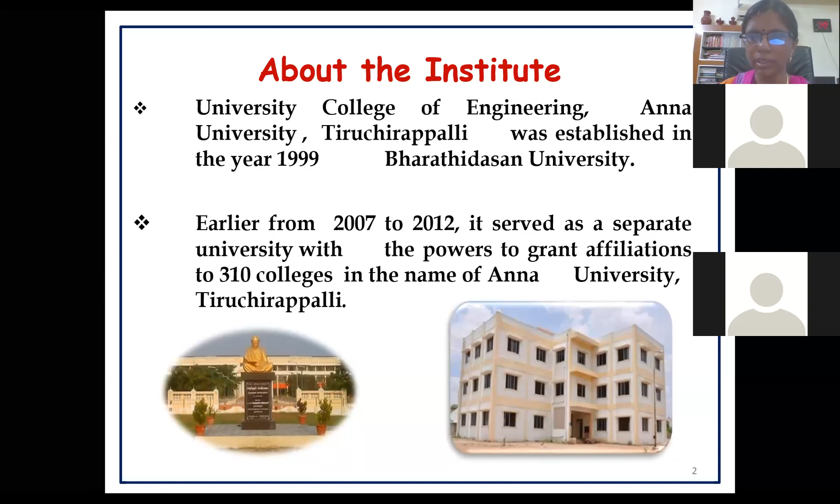We have more than 4 to 5 big buildings, which sprawl over an overall area of 354 acres. We have 15 departments offering BTech and BE courses in almost all disciplines, and we also have MTech, MS and ME programs, all accredited by AICTE, and also PhD programs under the control of Anna University, Chennai. There are around 5,000 students studying on this campus, and 700 teaching and non-teaching faculties, including non-permanent faculties, working here. It's a big campus completely under the control of the state government, Anna University, Chennai.

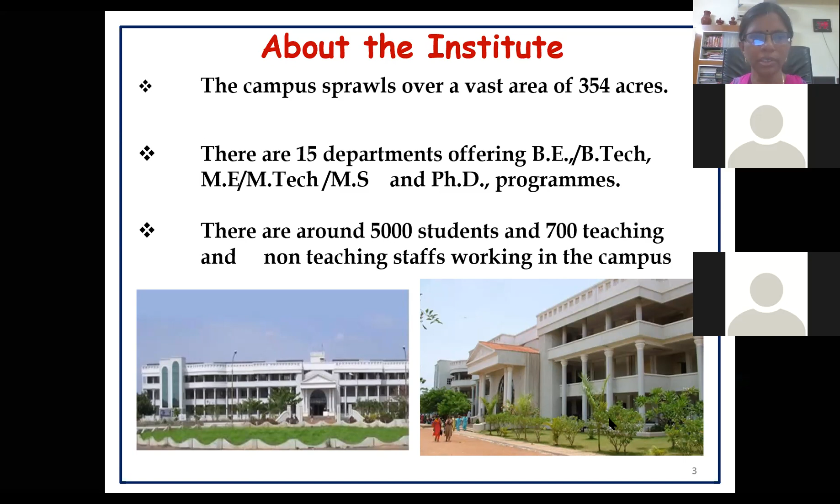So with this introduction, I go into the technical side of our presentation. We have to understand why we need this faculty development program.

So this faculty development program has been planned to throw light on the latest technologies available in waste management. Out of the different technologies available, I'm going to talk today about two different technologies called foam separation, which comes under the broad name of foam flotation, as well as biosurfactant foam separation technologies for wastewater treatment.

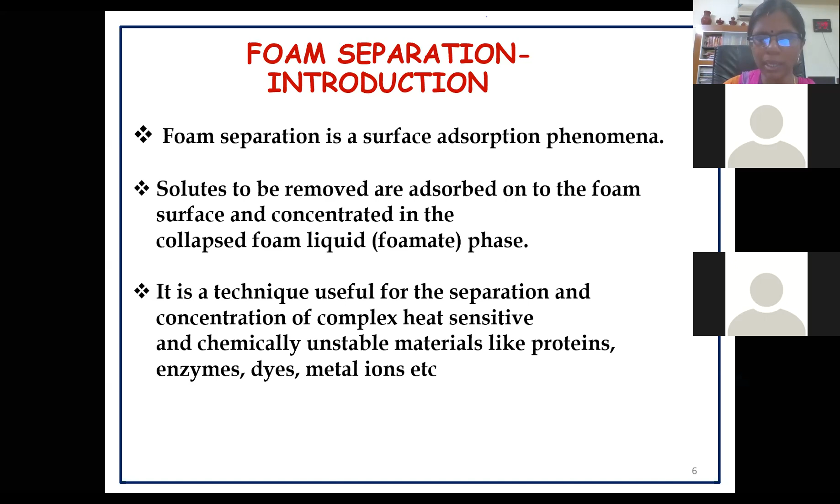That technology is now extended for the removal of pollutants from industries. So this is not a new technology, but the application has been widened to water treatment nowadays.

There are a lot of advantages of this foam separation technique. The young participants who want to work in water treatment can try this technology because of several advantages. The equipment construction is very, very simple.

There are no moving parts present in this equipment, so there is no friction, and the maintenance cost is very, very less. I'll show you the setup present in our laboratory, which can be used to treat very heat sensitive materials and also handle dilute solutions. These are some of the advantages of this technique.

There are several advantages of foam. Foam has got interfacial area. We heard that because of surface tension, the foam assumes the shape that plays a major role in adsorption.

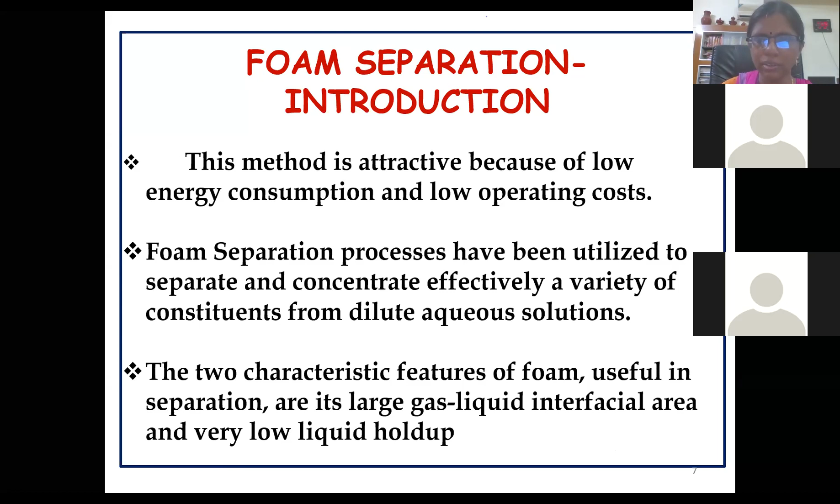When we add some surfactants and allow air or nitrogen into the solution, the bubbles get formed, and the foam or bubbles, when it rises through the liquid from bottom to top, it carries away the heavy metals and harmful chemicals from the effluent. That is a simple technique.

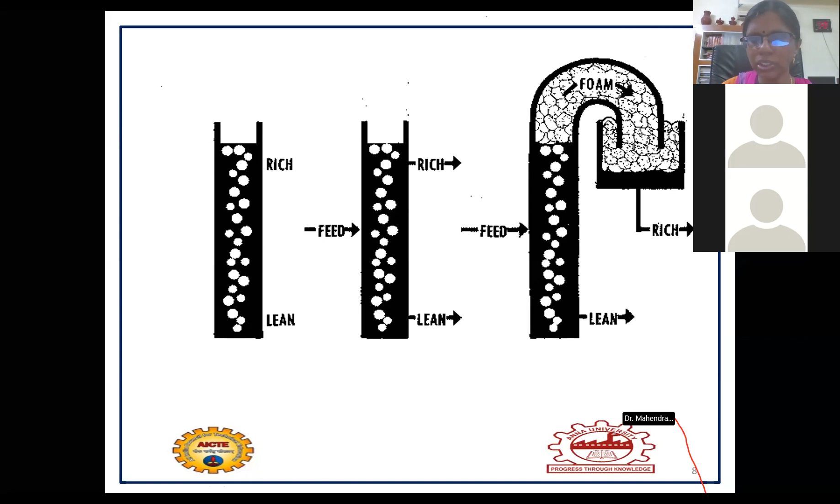Though the process looks simple, its application is very wide. We have to analyze the foam structure before going into the experimental part, because this foam structure plays a major role in the treatment.

When we see the structure of foam with the naked eye, it looks like a sphere, but actually foam is not a sphere. Foam looks like it has got a pentagonal dodecahedral structure.

Foam always clubs as three bubbles joined together, or four bubbles joined together, and we get different shapes of the foam.

When you see from the naked eye, you may say that the foam is of a spherical shape, but it is not. Because of this coagulation of three different bubbles, we get this triangle structure, called Plateau border structure, or when four different bubbles form, we get a stable configuration.

Because of this configuration, we get good adsorption properties. We need to study the foam structure also.

We have attempted some modeling part also, wherein we have done mass balance calculations and framed differential equations. Mathematical modeling also has been tried in our project. So we have to have knowledge about the foam structure also.

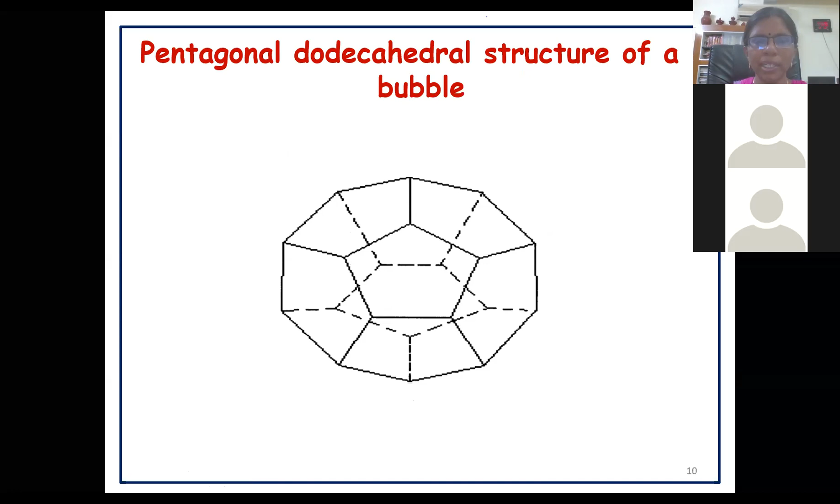This is the foam pentagonal dodecahedral structure. It's not a sphere. This structure is very important and plays a role in the adsorption of heavy metals and harmful chemicals from the wastewater.

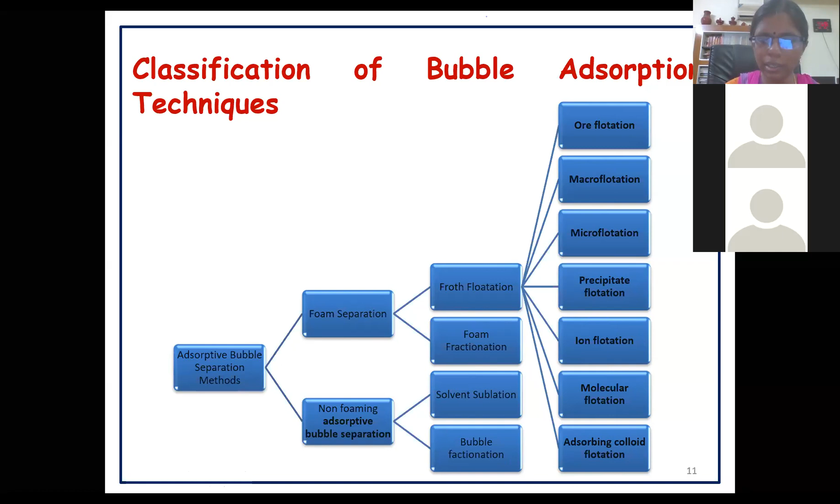Foam fractionation is a technology we have applied for our metal ions removal. These are the major classifications. We can work on any area depending upon our requirement. This gives the definition, and the next two slides will give the definitions of different technologies available.

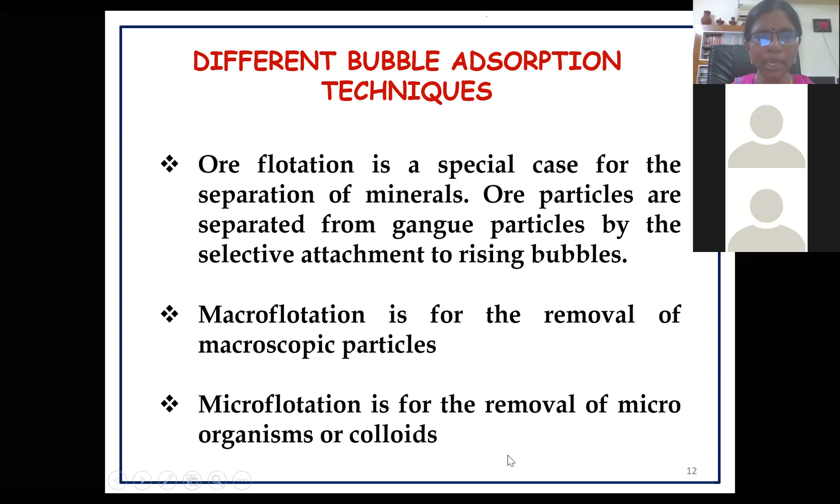Say for example, if you take ore flotation, we know that it is useful for separation of gangue particles from the ore. Minerals can be selectively adsorbed using the ore flotation process. Macro flotation is useful for the removal of macroscopic particles, and micro flotation is for the removal of microorganisms or colloids.

Similarly, ion flotation is for the removal of surface inactive ions through the use of surfactants, and molecular flotation is for the removal of surface inactive molecules. Precipitate flotation is where the precipitate is removed and the precipitating agent is other than the surfactant. Adsorbing colloid flotation is useful for the removal of colloidal particles. So these are some definitions of the different flotation technologies available.

Surfactant, or the bubble forming material, is very important and plays a major role in the success of the flotation process. The majorly used surfactants are sodium lauryl sulfate and SPAN 80. The chemical name of SPAN 80 is sorbitan monooleate. So these two are the very successful surfactants which are used in a flotation process.

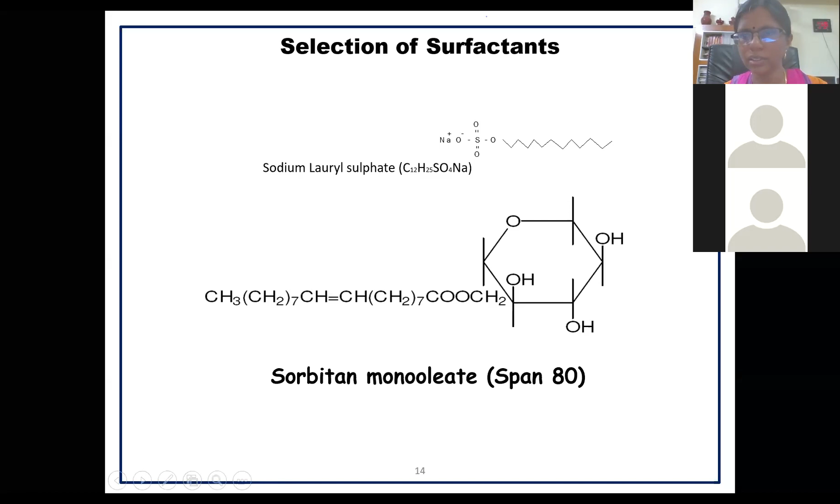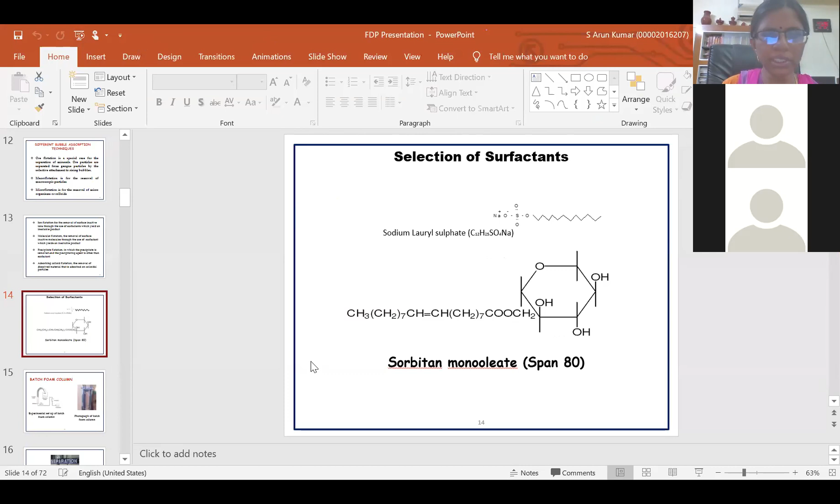So these are the successful surfactants which can be applied for the removal of harmful chemicals using the flotation process. This slide shows the batch experimental setup available in our laboratory, which we have designed for carrying out the batch experiments. We tried initially with the foam separation alone.

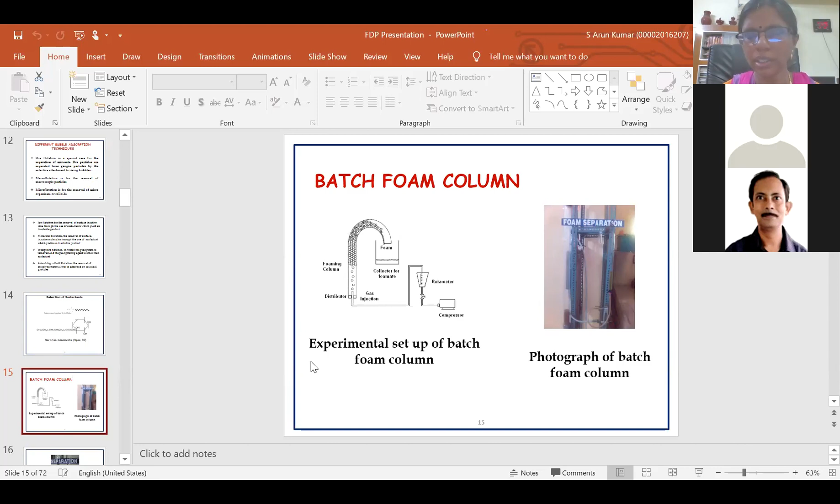Madam, full screen, please. Yeah, sure. Is it okay, sir?

Yes, okay. So this is the batch biosorptive batch foam separation column available in our laboratory, and the experimental setup is also given here. A simple compressor through which we can measure the flow rate, and through which the air is passed. Air, even nitrogen cylinder, can be connected here.

There is a small glass or polymeric column in which the liquid to be treated, or effluent to be treated, is taken. When we pass the air slowly into this, we should have added some amount of surfactant into the liquid earlier, before starting the experiment.

Once the air is injected, the foam starts to form, and as it rises from the bottom to the top, it carries the pollutants like phenolic compounds or metals or any other harmful chemicals present in the solution along with it on its surface, and it gets collected gradually.

As it travels upwards, the carried away liquid gets drained back again, and we get the dry foam at the top. So we can collect the dry foam in a beaker, and once we keep it on the table for 1 hour, it collapses, and the concentrated liquid or pollutant gets collected on top.

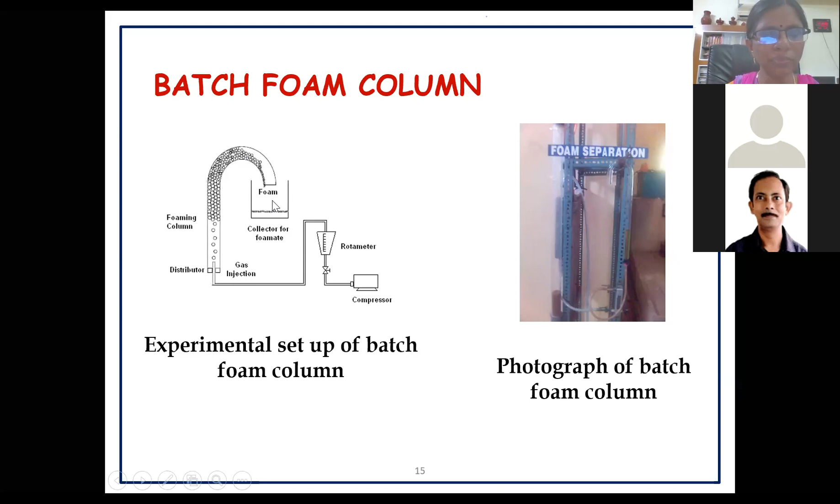This part is called foamate, and left over is the clean liquid. I shall show next the photographs where the foam is rising.

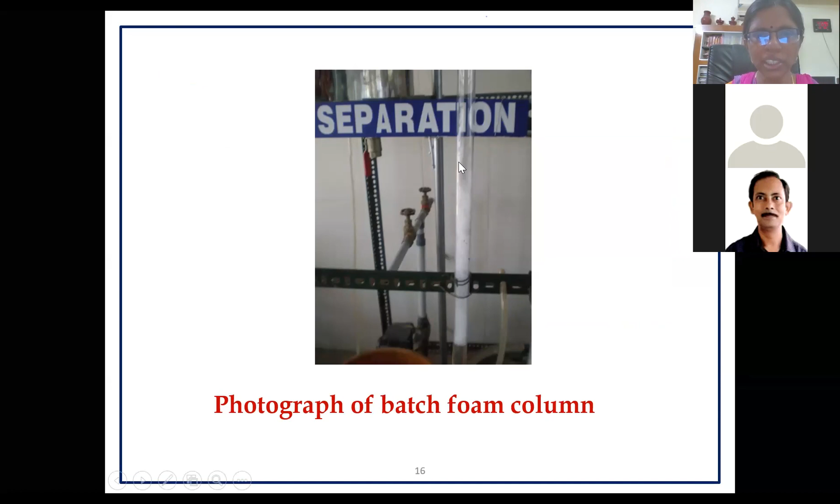Here at the bottom of the column, the pollutant liquid is taken, and through the compressor the air is passed, and the foam gets raised here and collected at the top of the column.

And these are the dimensions of the foam separation column we used in our study. Nearly 2 centimeters of diameter. Height we can fix according to our need.

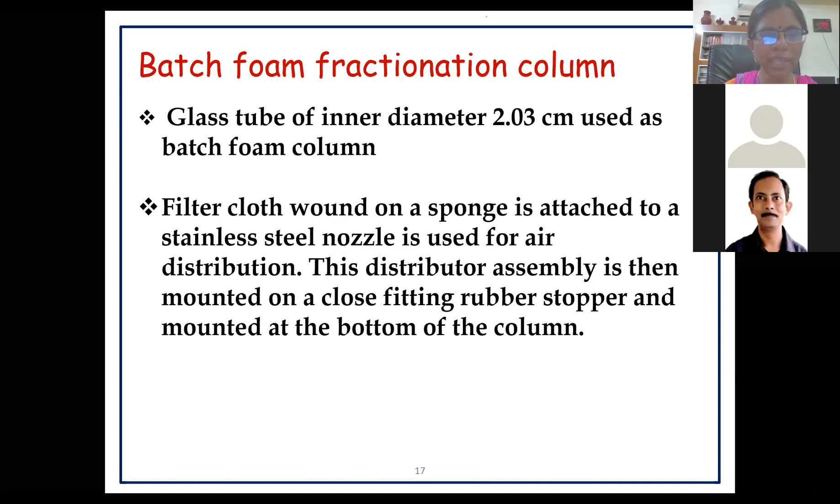For sparging the air, we have made a filter cloth wound sponge attached to the nozzle, so that uniform distribution of air takes place. Distribution of air is also a very important factor for improving the efficiency of the separation. So this assembly is to be kept at the bottom of the column, so that a uniform distribution of air happens, and the air carries away the metal ions.

Again, the design of sparger is very important, because once the sparger design fails, we may not get the proper size of the bubbles, and also it may collapse during its travel from bottom to top. So sparger design is very, very important, and we have to take proper care in designing the spargers. Depending upon the bubble size requirement, we can have different types of spargers. For our project purpose, we selected a sparger with a pore size of 15 to 40 microns.

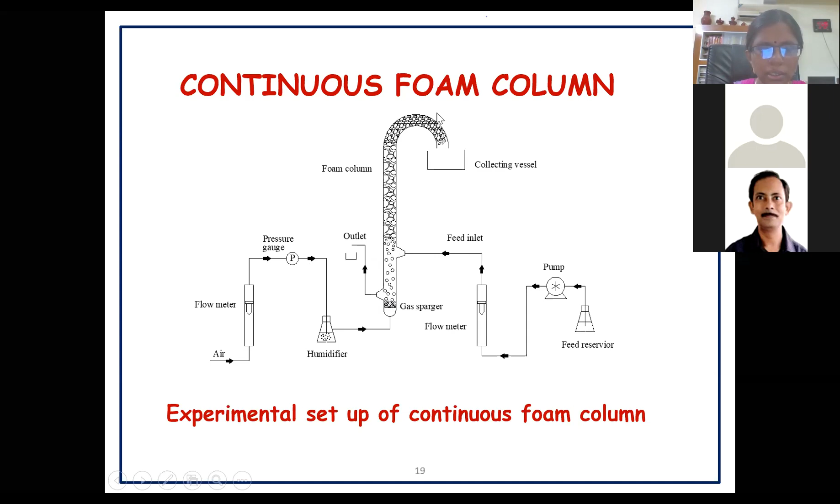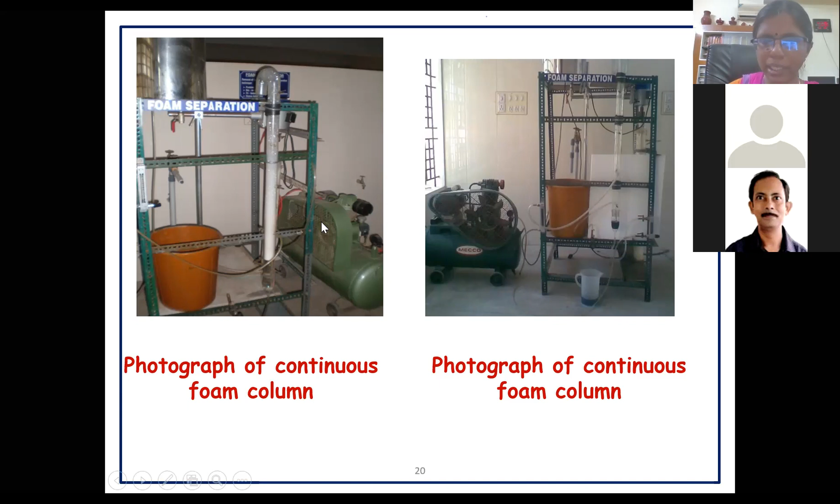So this is the setup of our continuous foam separation column. This is the bottom of the column. Here, from the compressor, the air is circulated through the sparger, and we also give input to the column of the liquid effluent. The foam gets collected from the top, and we can collect the dry foam from this part. I hope the participants can understand the experimental setup.

So this is the experimental setup and the foam separation operations. Now, what are the applications of this foam separation operation?

Any tannery or electroplating industries which let out heavy metals can very well apply this technology for removal of heavy metals. For example, even paper mills which use chromium chemicals, lead or other chemicals, can also successfully utilize this technology for removal of harmful chemicals.

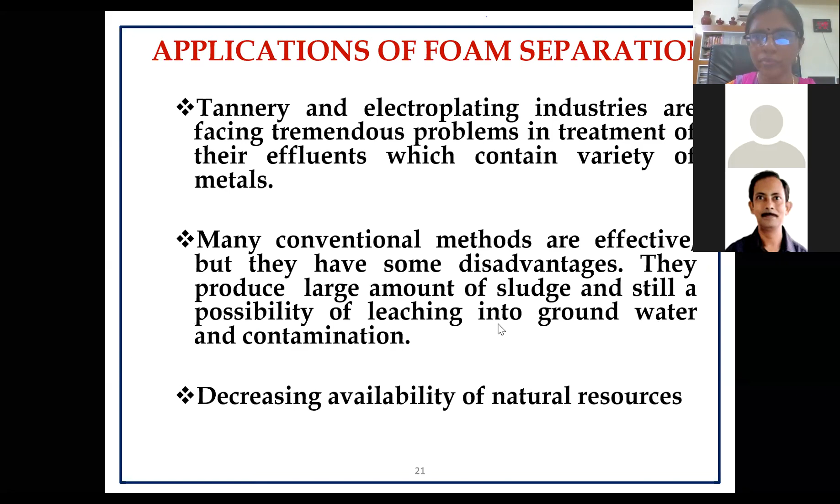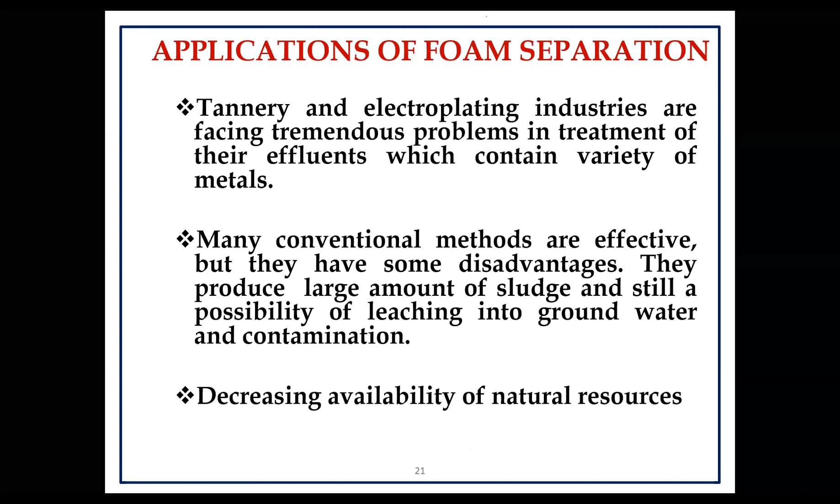Many conventional methods are effective, but there are some disadvantages - they produce large amounts of sludge. That is one of the biggest advantages of this process: we get very little sludge collected at the top of the column, which needs further treatment. So a large quantity, say 1000 liters, is converted into some 5 liters. So there is a reduction in the concentration and quantity of sludge happening here - that is the biggest advantage of this process.

This foam separation can be applied to the removal of metal ions like copper, zinc, and chromium. Copper and zinc are sources from electroplating industries. Chromium is the source from tannery industry. We took both types of effluents and successfully utilized this technology for removal of these chemicals.

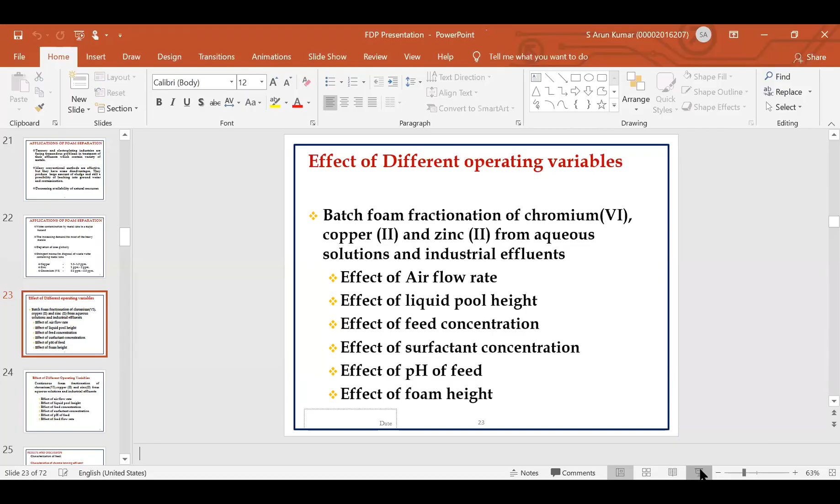So we also studied the different parameters which affect the process, such as flow rate, liquid pool height, feed concentration, surfactant concentration, pH of the feed, and foam height. For continuous operation, there is one extra parameter which has to be measured and controlled - that is the feed flow rate.

So these are some of the parameters whose effect we have experimented with for carrying out the operation.

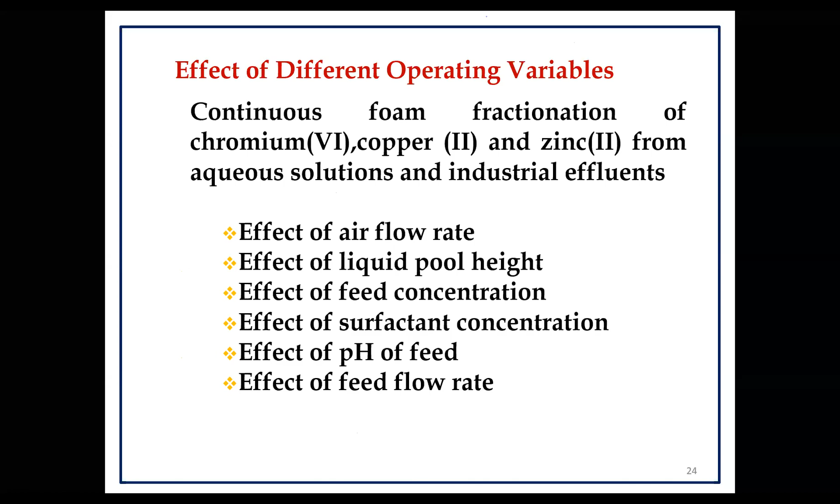The effluents which we took from chrome tanning industry - Tiruchirappalli has got a lot of tannery industries, so we collected effluent from a nearby tannery industry, which has chromium concentration of around 3000 ppm, whose odor is also very high, and the color is very dark brown, and the pH is very, very low. Considering all these points, the experiments had to be carried out.

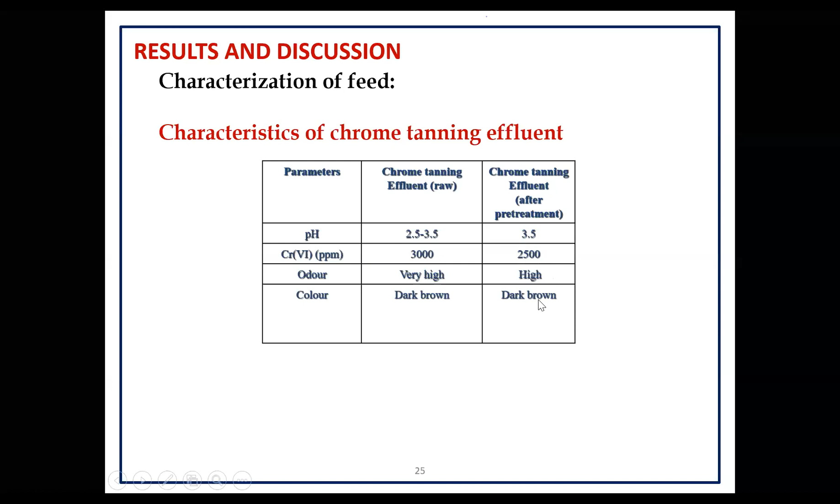The real effluent characteristics are given in this form, after pre-treatment - that treatment being filtration and settling. After pre-treatment and settling, the effluent concentration changes to a pH of 3.5, chromium concentration 2500, and the odor again is high, with dark brown color. It was taken for the foam separation operation.

Similarly, we have collected the electroplating effluent which contains copper and zinc from an electroplating industry from Madurai.

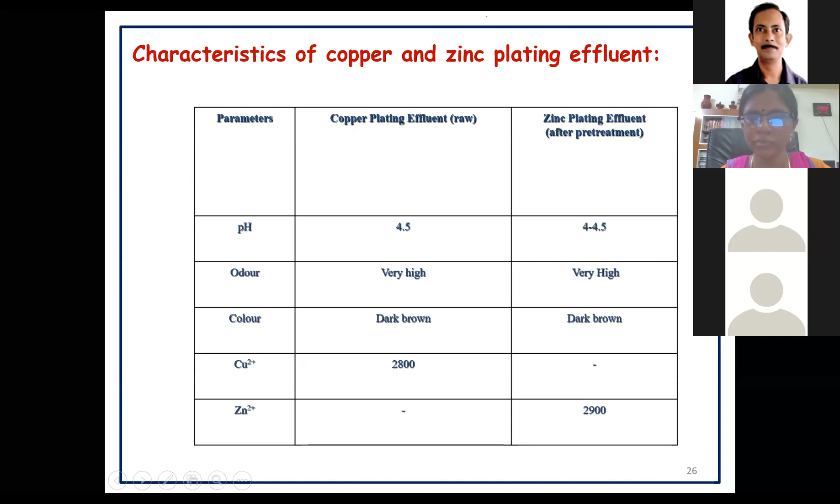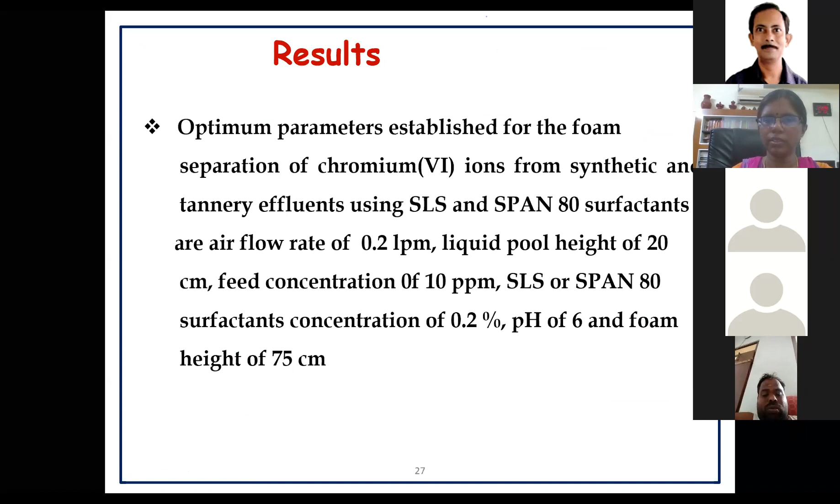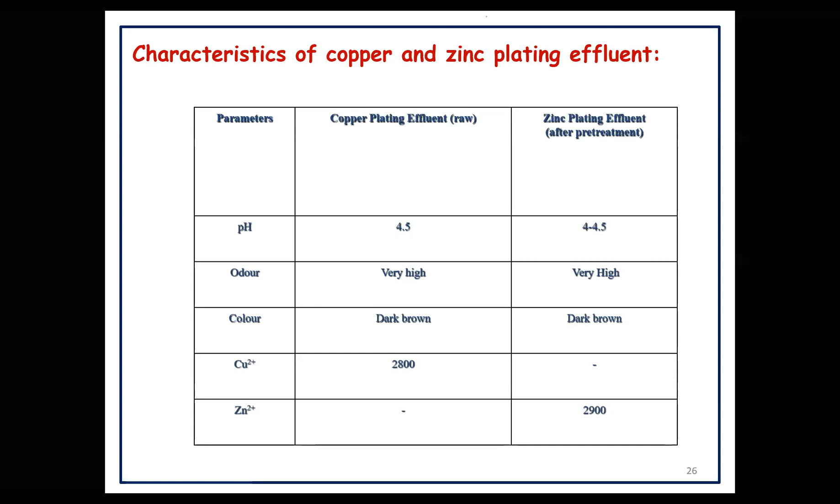So these are the effluents we have used for our studies. I don't want to go into the results of our study. So with the introduction part, if further clarification is needed, if anybody wants to work on it, we can have further discussions.

So results show that we used sodium lauryl sulfate and span 80 as successful surfactants for removal of the metallic compounds present in the effluent, and we controlled the airflow rate, liquid pool height, feed concentration, and surfactant concentration, and also pH has to be adjusted.

Since the actual effluent has got very low pH, it has to be adjusted to 6, and the foam height was around 75 centimeters. So these are the results we got. We got all these optimization studies using statistical optimization methods.

Once we optimized all these parameters, we applied it for continuous column studies also. Initially we did experiments in a batch column and extended to continuous column operations. So the maximum enrichment ratio was around 3.7 for tannery effluent, and we were able to apply it.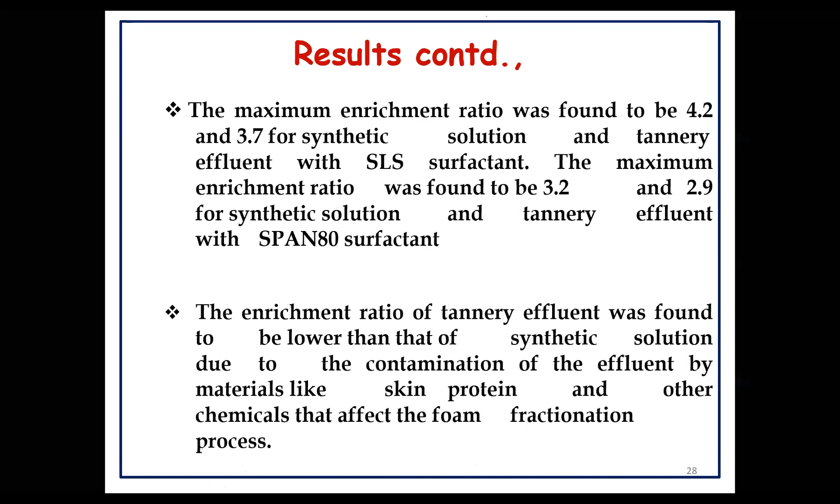We were able to get only a little lesser amount of efficiency for tannery effluent because of the contamination of the effluent and interference by the skins and proteins present in it. So that has to be filtered. Pre-treatment has to be done before going for this foam separation operation.

So I close this foam separation discussion with this introduction. I'd say we have completed the lab scale study, continuous column study, and also done some mathematical modeling. So our technology readiness level for this project is TRL3.

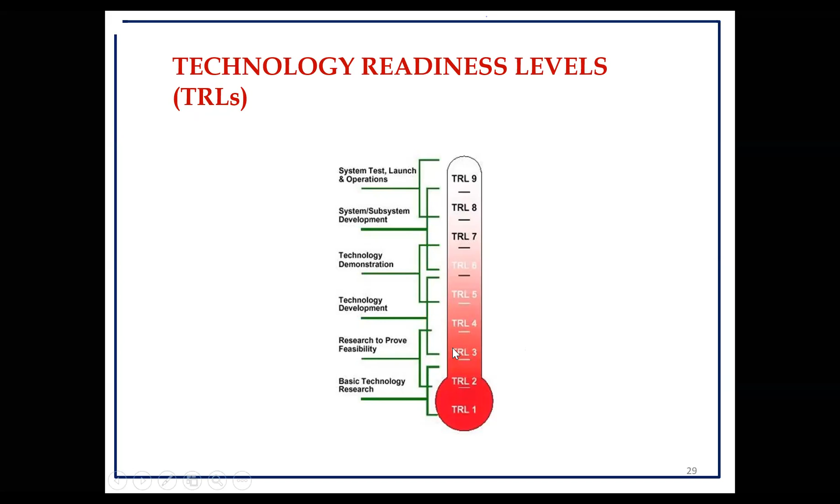I hope most participants can appreciate and have some idea about technology readiness level, because the funding agency is now looking for projects which are at least at the level of 2 or 3.

Only the SERB project asks for basic studies, whereas most projects from DST, DBT, and other funding agencies ask for projects with a technology readiness level of at least 3 or 4.

So this technology is at level 3, that is, proof of concept demonstrated analytically and experimentally, and we have successfully applied this technology for removal of metal ions as well as phenolic compounds, and we have also published our paper.

So the technology readiness level is 3, and based upon our experience we have now started to apply for projects that go for pilot scale studies and technology commercialization in collaboration with industries.

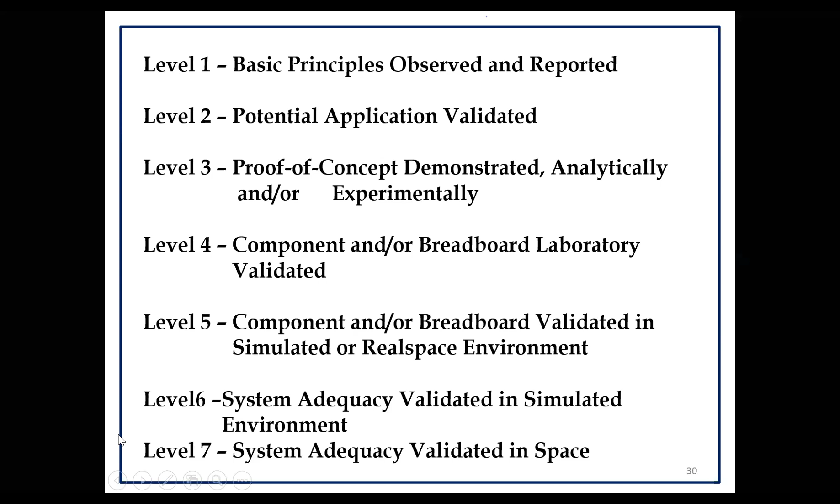And we have also done some mathematical modeling. The chemical engineering people or engineering people who are here can appreciate the concepts. I told you about the bubbles.

Bubbles have the same size and shape - actually, that's not true. Bubbles have different sizes and different shapes. As we assume the bubbles have a spherical shape, that is not actually the bubble's shape.

Once we observe the bubbles through the microscope, they have a pentagonal dodecahedral structure, surrounded by films and plateau borders. These are helpful for mathematical modeling. The structure of the foam is very important to analyze for framing differential equations.

So we made all these assumptions before going for the mathematical calculations, assuming each bubble has a dodecahedral structure. But as we said earlier, when 3 bubbles club together we get one shape, and when 4 bubbles club together we get a different shape.

So all those inequalities are neglected. We assume all the bubbles have a uniform shape and structure, and the coalescence of bubbles is ignored.

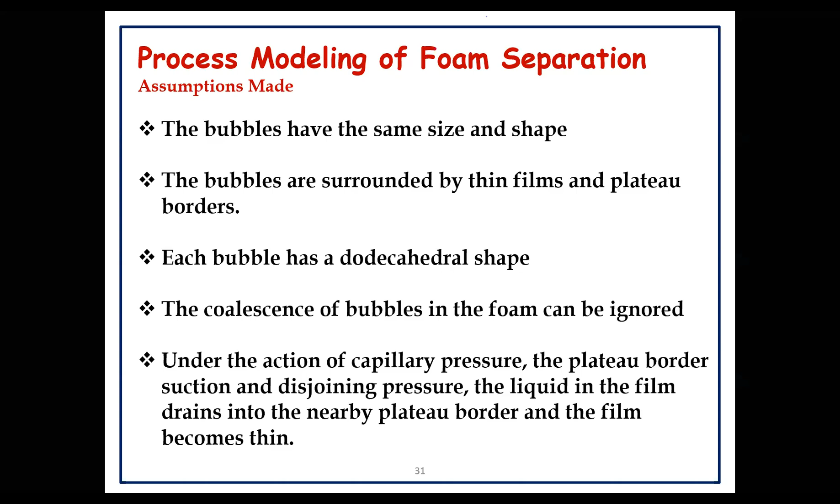These are some of the major assumptions made in the derivations, which cause some error, some difference between the experimental value and the mathematical modeling. So we have to put a material balance equation for the film and a material balance equation for the plateau border.

Plateau border is nothing but the films which are present. The corners of the foam are called the plateau borders, and we have to calculate the thickness of the film, and the plateau border area is then calculated based upon the thickness of the film. We used a tensiometer for finding out the film thickness of the foam.

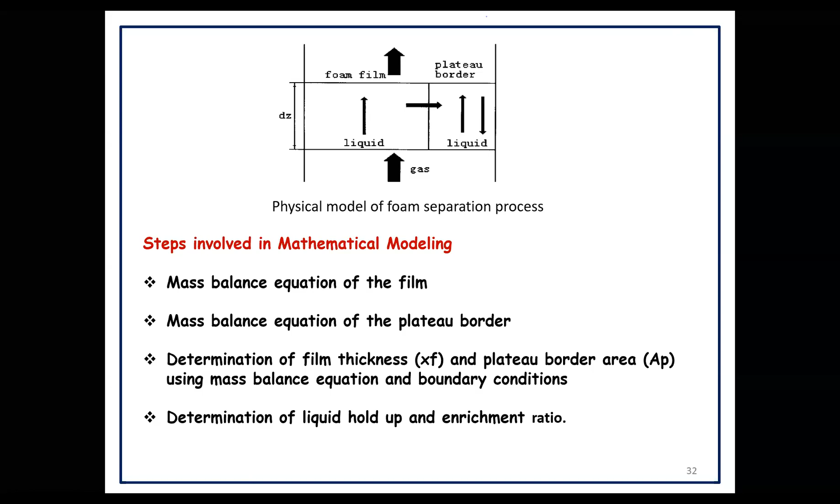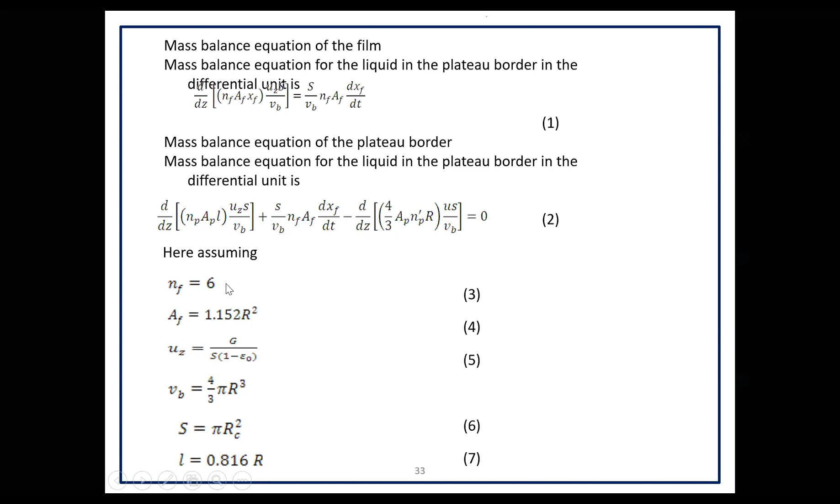Finally, we have to calculate the liquid holdup and enrichment ratio. These are some of the equations we used for our mathematical modeling, where we have also assumed the bubbles to have volume 4/3 pi r cube. The number of films per bubble is 6. So all such factors we assumed, and we got the enrichment ratio, which is given by this equation.

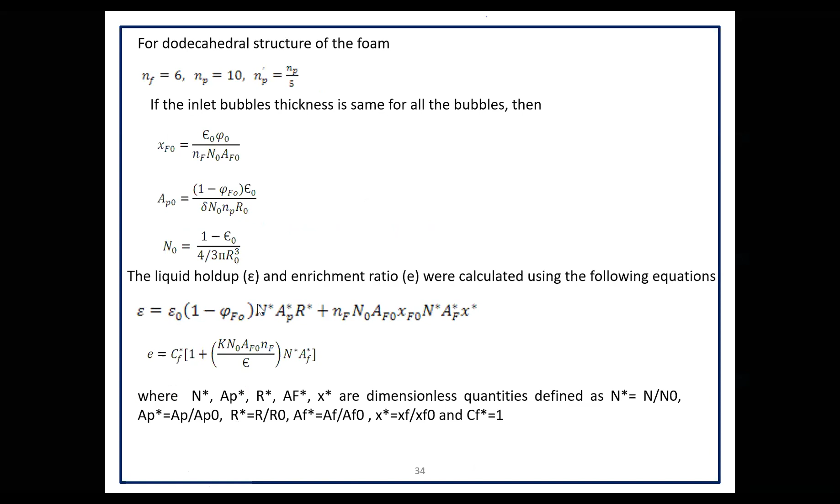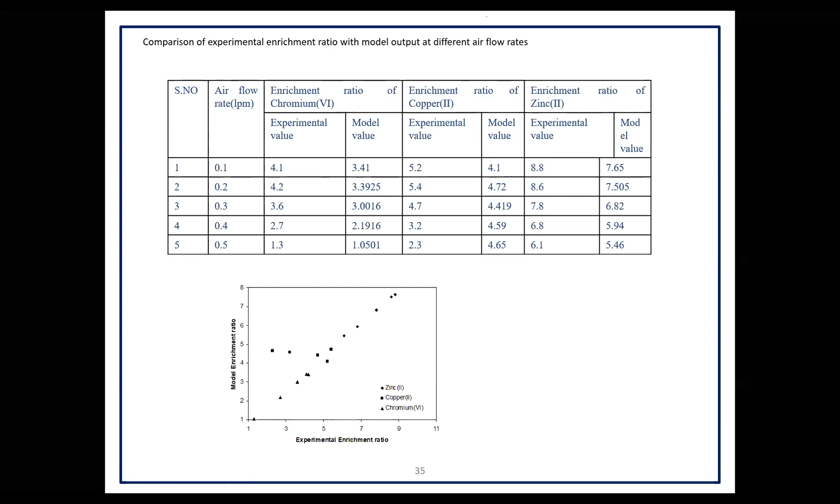The difference between the actual experimental value and the model value is given here. For different airflow rates, the difference between the model value and the experimental value is around 30%. That happened because of the drastic assumptions made. When we eliminate all such assumptions, I hope we may get better equations and the results will become similar. So further study has to be made, and those who are strong in mathematics can go further into the subject.

With this, I close the foam separation part of the treatment. Next, the extension of the advanced process of foam separation is the biosorptive foam separation technology, which gains much importance in the bioseparations field.

We have successfully applied the biosorptive flotation or biosorptive foam separation technology for the removal of metal ions as well as for proteins. So those working on protein separations can make use of this technology very successfully.

One clarification, ma'am — you said you can use nitrogen to cool things, won't that decrease the temperature? Nitrogen may be used as a refrigerant, so whenever we use pure nitrogen, the temperature reduces. In another slide, you said the operating variables don't include temperature. Yeah, because temperature doesn't much affect the process. But when nitrogen is used, the temperature might cool down — will it affect the efficiency? Only for certain situations do we use nitrogen, for materials which decompose in the presence of oxygen; for those, we have to go for another technique and nitrogen has to be purged. Otherwise, air is cheap material for producing it. So the composition of air is also important, right ma'am? Yes, yes. So with just a filter we can straight away take air from the atmosphere for usual operations, but only for extremely different, odd cases do we use nitrogen.

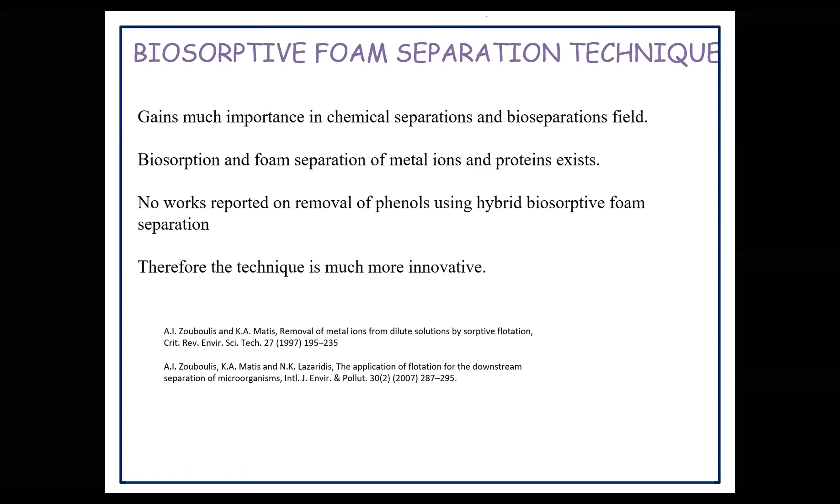After Zouboulis, we started this work. Many people have worked on foam flotation or foam separation, but nobody has worked on this biosorptive foam flotation process except Zouboulis, who himself contacted us and collected all our publications. So we are proud to say that this technology is very appreciated, an emerging one. Biosorptive foam separation clubs two different technologies called biosorption followed by flotation.

I would like to say a few points about biosorptive foam separation technology. Removal efficiency increases by subsequent stages of biosorption and flotation. Through flotation alone, we were able to achieve only some 70 to 80% removal, so to achieve 100% removal, we clubbed the biosorption and flotation technology.

At present, only Zouboulis and Matis from Aristotle University, Greece, have worked successfully on this technology, and after them, we tried it. Because of these advantages, we applied our technology for the removal of phenolic compounds. Since our department is the petrochemical department, phenols are petrochemicals which pollute the atmosphere, so we tried to remove phenolic compounds from industrial effluents.

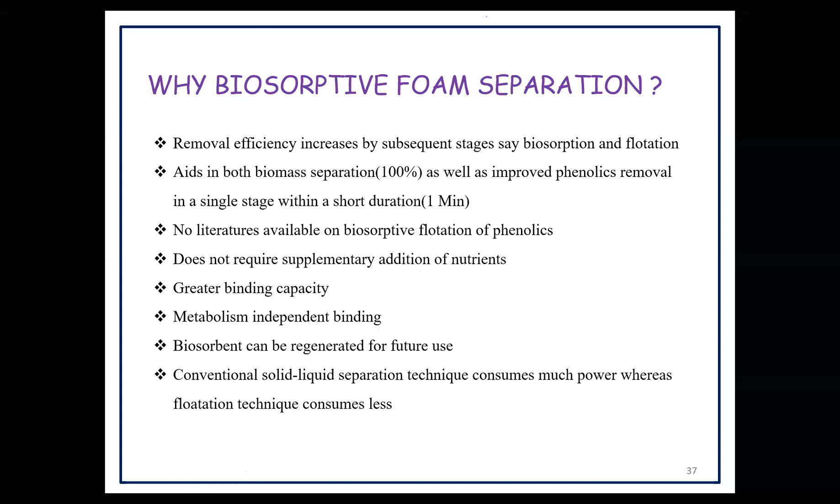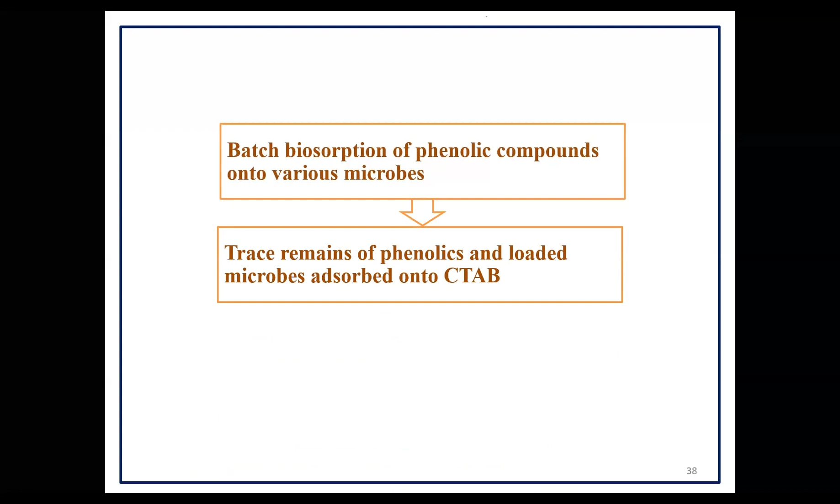So these are the steps involved in the batch biosorption process, the biosorptive flotation process. Initially, we carry out the biosorption process, and after that, it is followed by treatment with microbes, followed by the flotation technology.

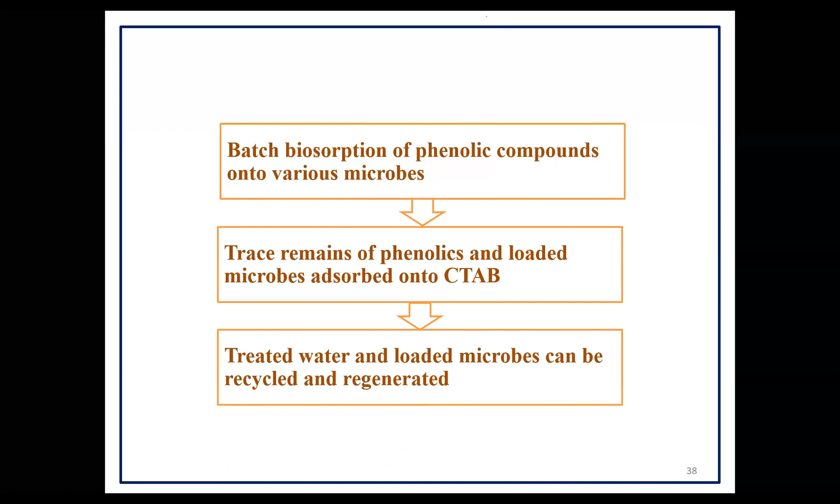So these are the bacterial or microbial cultures we used. Both bacteria, fungi, and yeast we used for microbial biosorption. In bacteria, we tried Micrococcus lylae, Pseudomonas putida, and Bacillus cereus, and we tried to remove different phenolic compounds from the effluent.

After this biosorption process, we used surfactant in foam separation, and we got the concentrated overflow and the treated effluent at the bottom of the column.

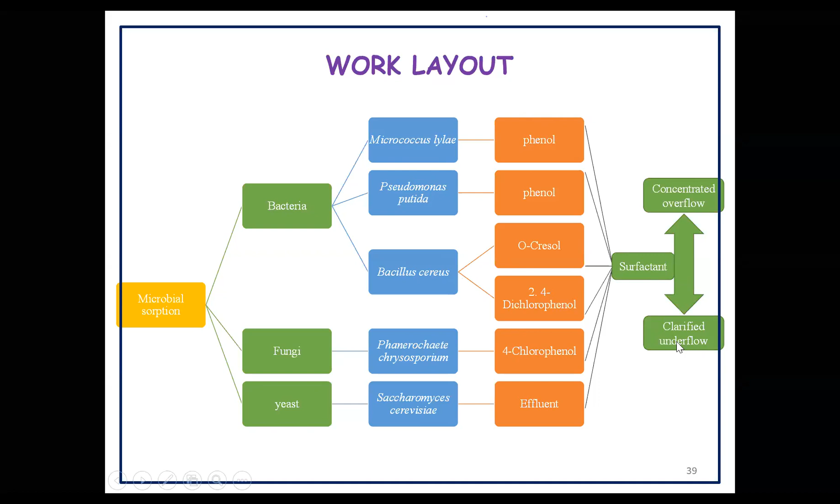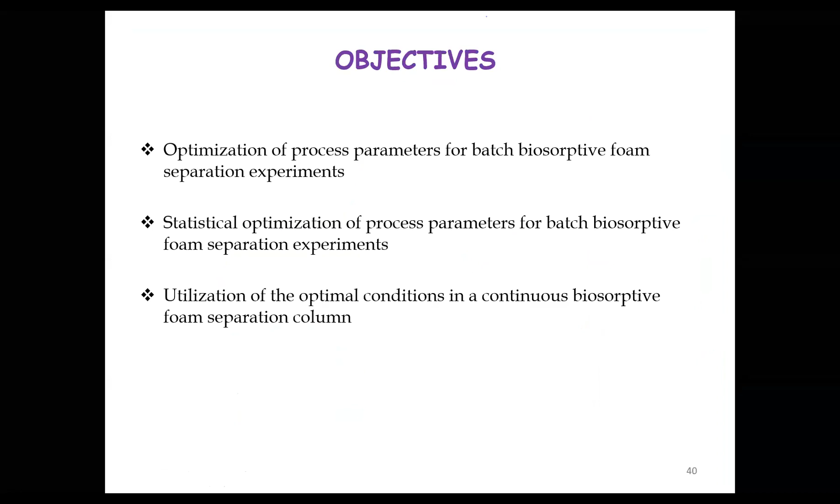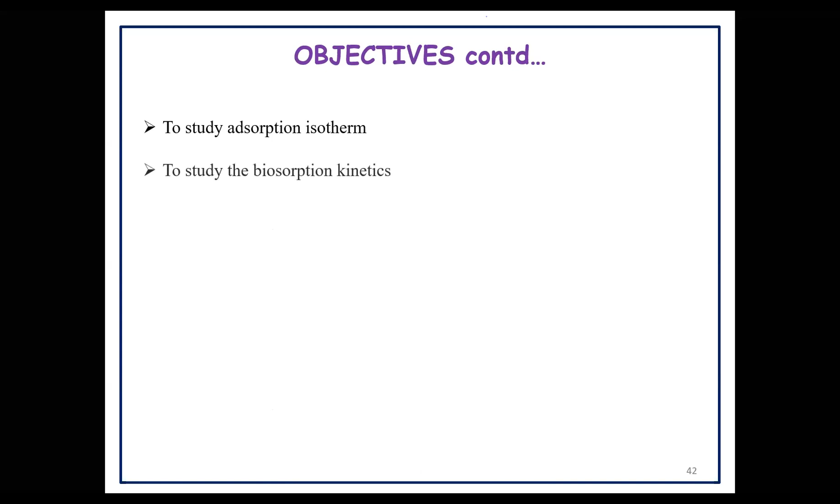So these are some of the objectives. We initially carried out all the experiments in batch biosorptive foam separation techniques, followed by continuous foam separation process. We tried to remove phenolic compounds like phenol, 4-chlorophenol, 2,4-dichlorophenol, cresols, and paper mill effluent using the different microbes mentioned here. We have also done biosorption kinetics, mathematical modeling, and isotherm studies.

Apart from that, our institute has a centralized instrumentation facility, and we have a center of excellence where we have all the analytical instruments available with us, like SEM, TEM. We also got TEQIP funding, through which we have purchased a lot of equipment for our institute.

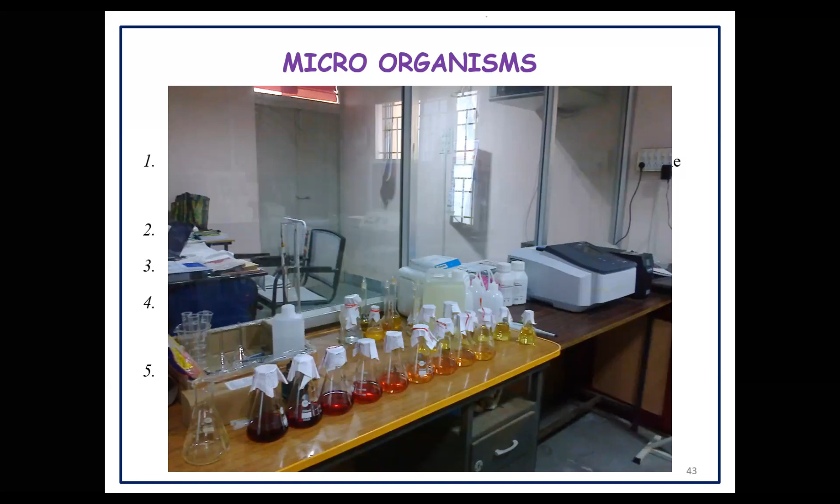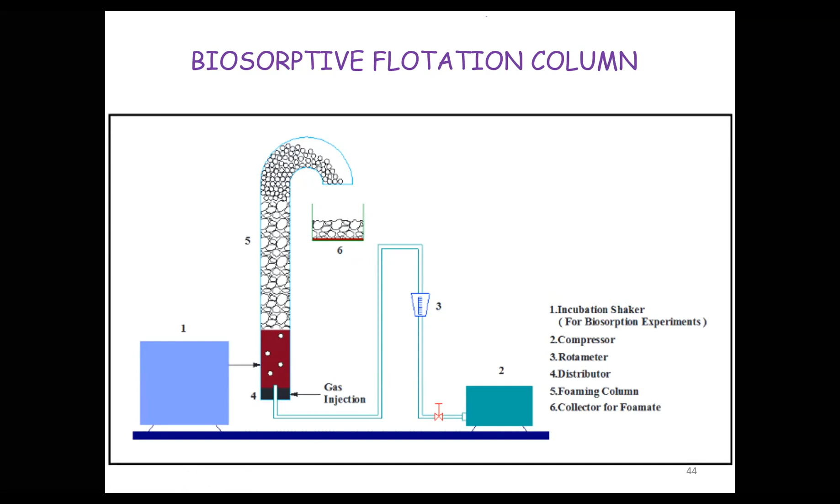So this is a small experimental setup diagram which shows the biosorptive flotation process. I have already shown this diagram. The only part added here is the incubation shaker, in which the biosorption part is carried out, followed by the foam separation part. So we have clubbed the biosorption process with the foam separation technique. This is the combined, hybrid setup of flotation with the biosorption process. That is the difference between the flotation and the biosorptive flotation process.

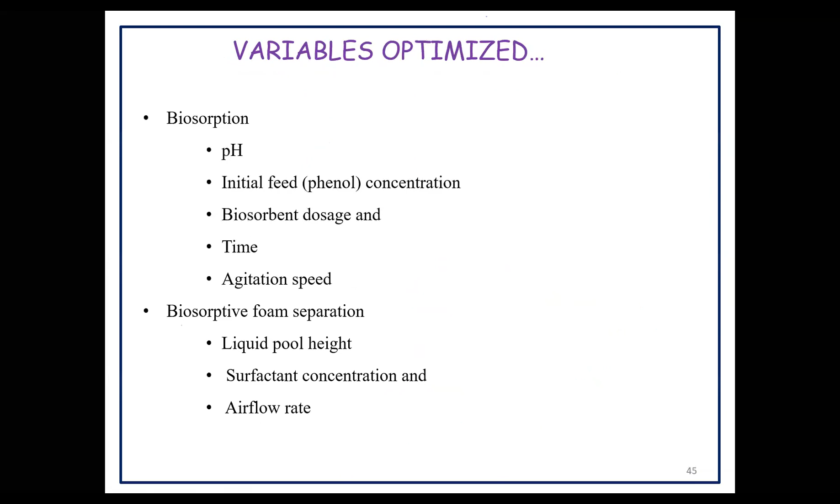So the variables optimized are pH. Some variables are already given in the foam separation part. Apart from that, for the biosorption part, these variables can also be optimized. For the foam separation part, I've already given them.

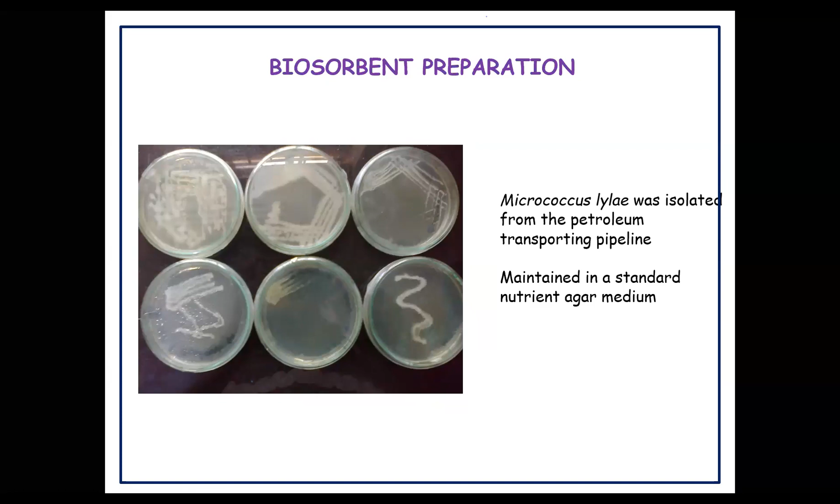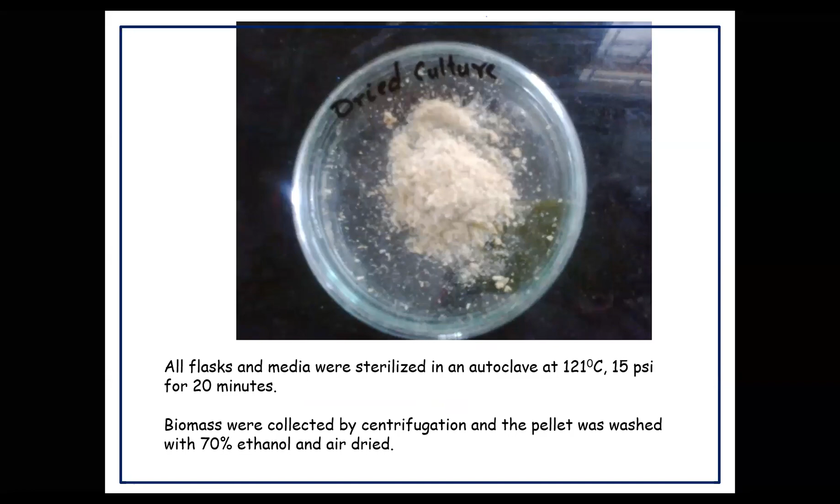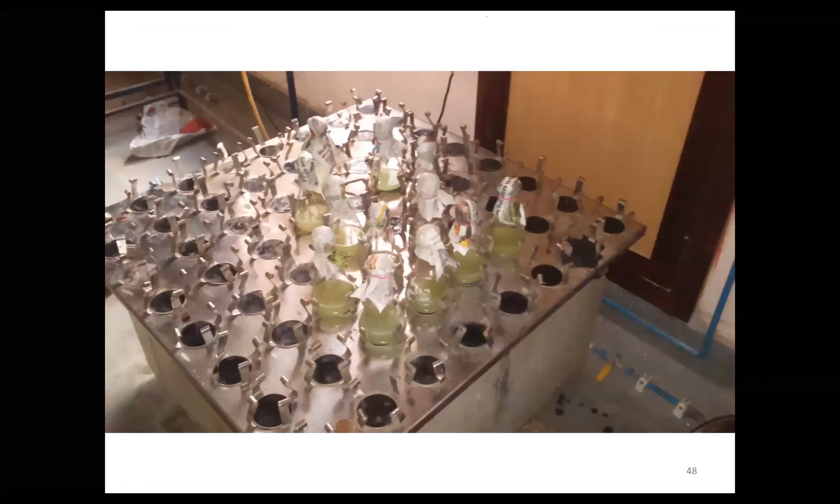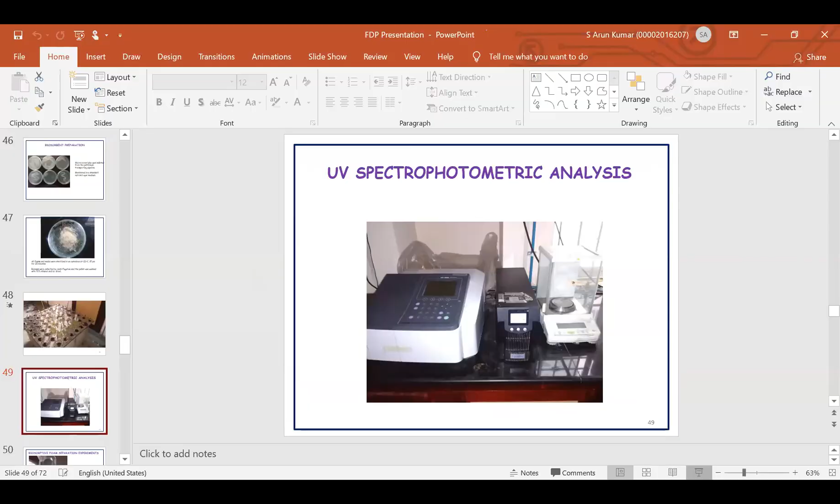So this is the UV spectrophotometer available, which can be utilized for phenolic compound removal.

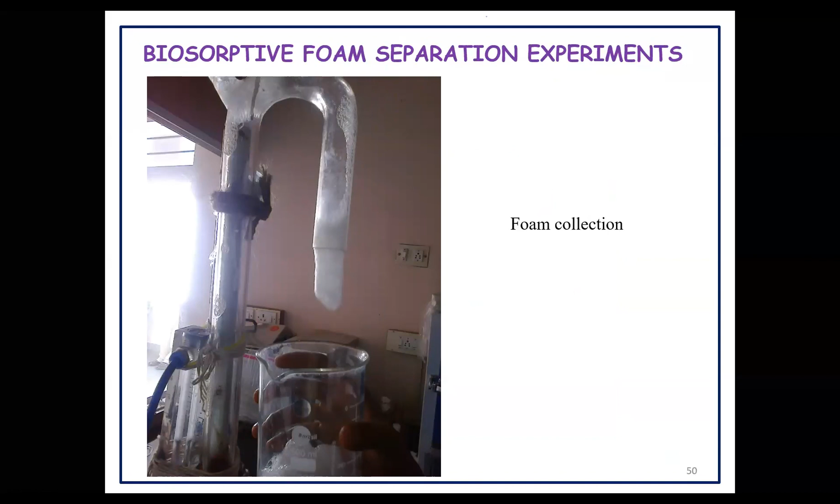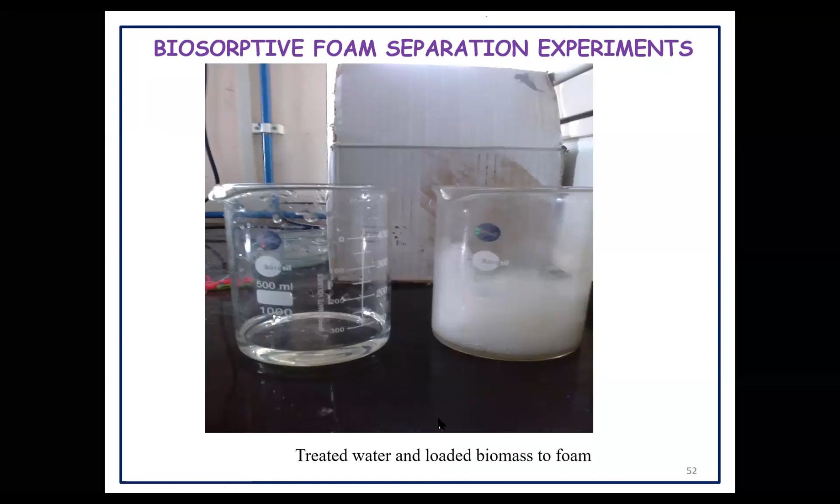See the phenolics with the biomass which we have collected at the top of the column. See, this is the treated effluent. This photograph shows the beakers containing the treated effluent and the biomass.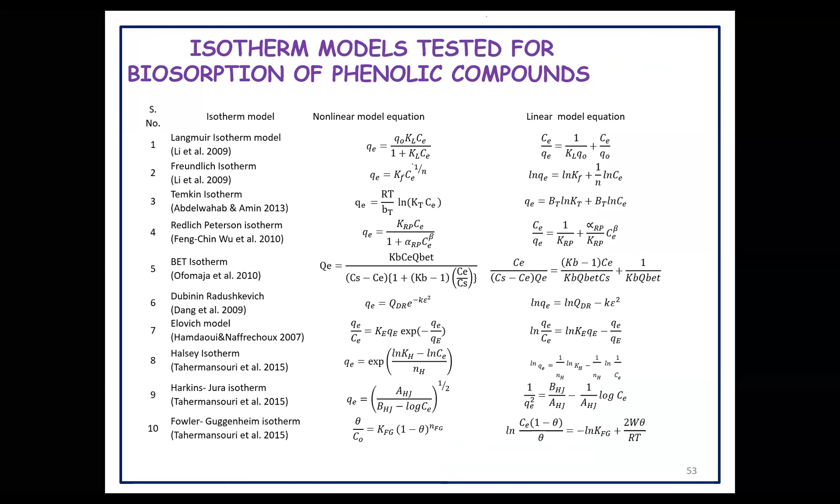So these are the biosorption isotherm models. We selected 10 isotherm models for our studies. And this is the photograph of the continuous biosorptive foam column, which we have designed and fabricated in our department.

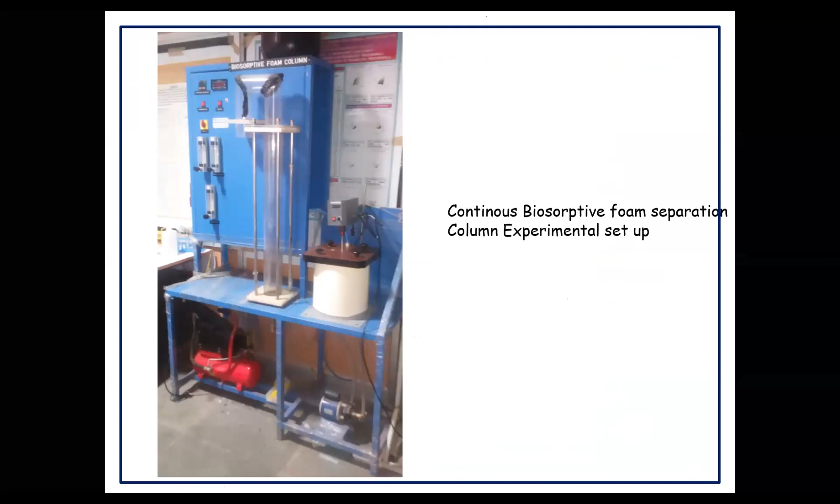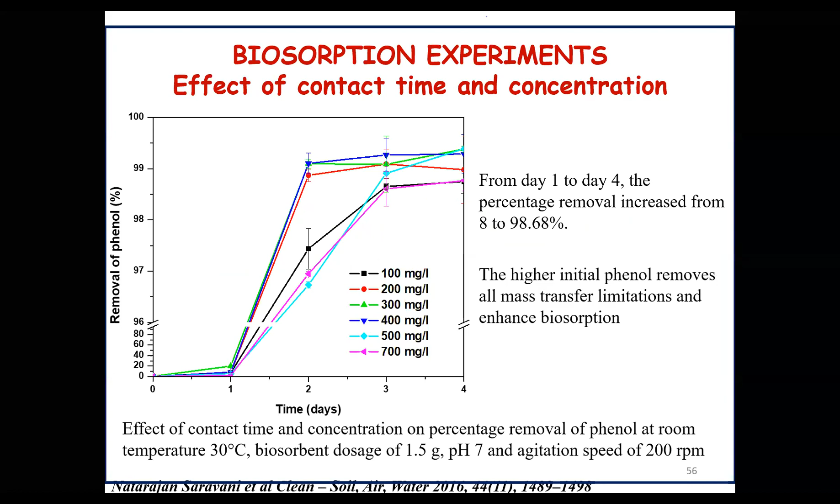So here I present the results of CTAB surfactant used for the extraction of phenol using Micrococcus lylae. These are some of the results. I don't want to explain more about this. Anyone interested to work more on this can go through it.

For the analytical part, we used FTIR studies to confirm whether phenolic compounds or metal ions have been removed and adsorbed onto the foam. We got results showing that the phenolic compounds have been very nicely adsorbed onto the foam surface.

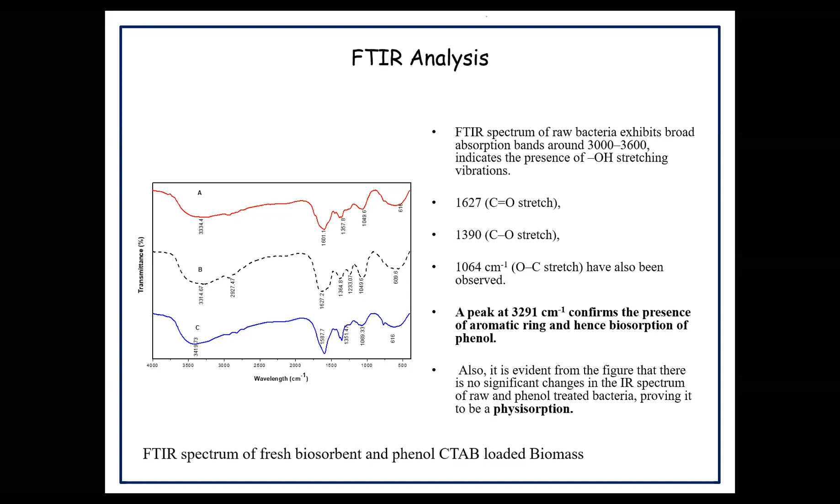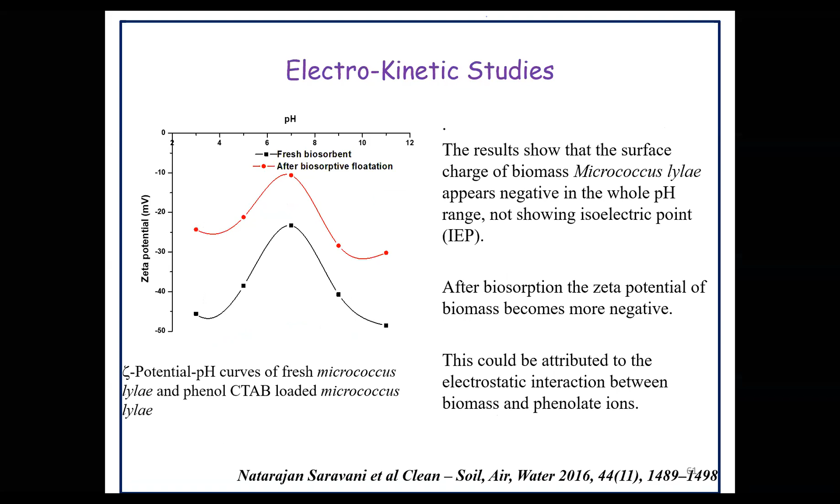We also did CTAB zeta potential studies to find out the electrostatic interaction between the foam and the phenolic compounds, and these are the results we got for the optimum conditions. Phenolic concentrations up to 500 ppm can be utilized. The time required for carrying out the experiments is 2 days, and the optimum pH is 7.

So these are the CTAB dosages. CTAB is nothing but the surfactant, cetyl trimethylammonium bromide.

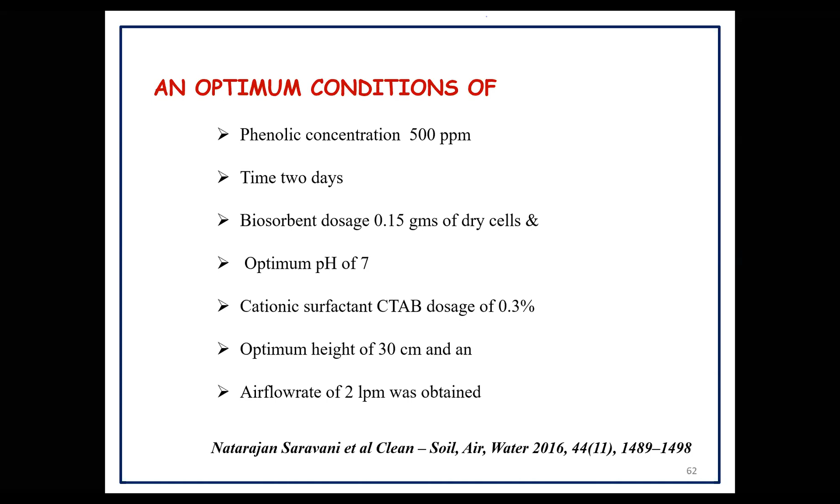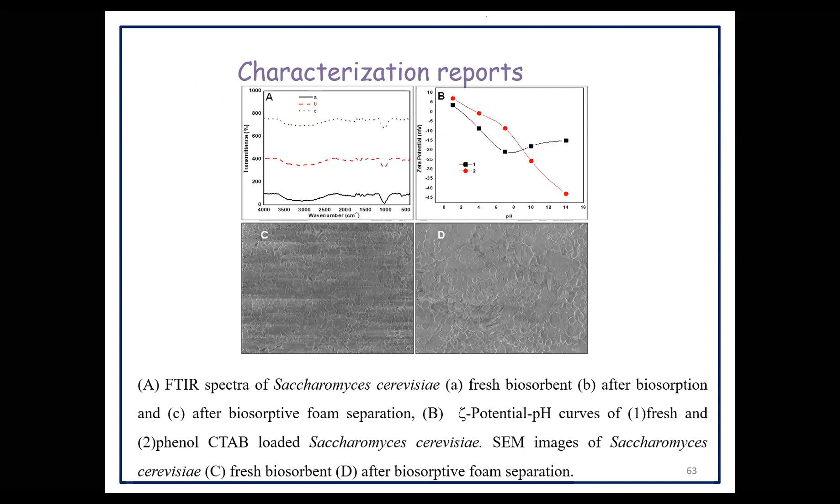That dosage is 0.3%. This work has been published in Soil, Clean Soil, Air and Water. So these are our characteristics from the FTIR report, and the SEM images show the difference between the fresh biosorbent and the biosorbent after carrying the phenolic compounds.

So again, we carried out the mathematical modeling using mass balance technologies, and we needed software for that. Before 5 years, we used C++ as the software. Now MATLAB and other software can be utilized for mathematical modeling.

So these are the conclusions. We can very successfully apply our work for phenolic compound removal as well as metal ion removal by using this biosorbent foam separation technique.

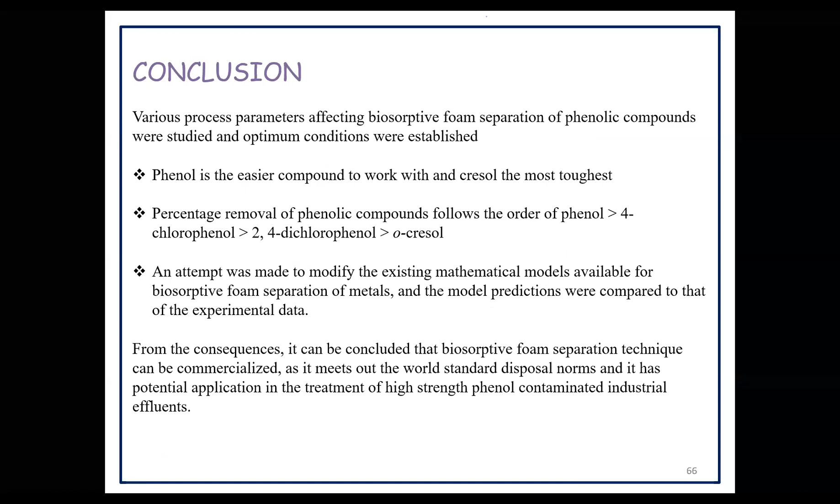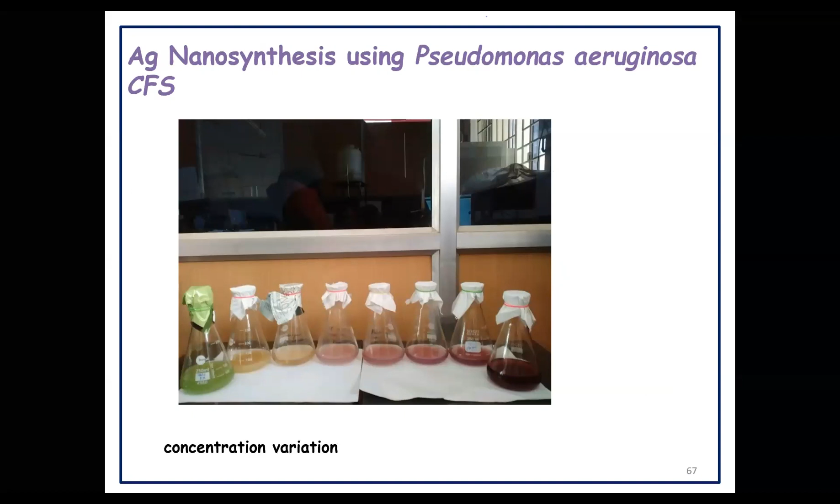So this study can be further extended by using nano components also. Pseudomonas aeruginosa can be utilized for the synthesis of silver nanoparticles, which can further be utilized for treatment. This is just initiated work; later on we left it. It was giving good results, so anybody interested can work on it.

So these are some of the research activities going on in foam separation and biosorptive foam separation in our laboratory. Thank you so much.

So there are a few other works going on in our laboratory on nanomaterials. We have done extensive research on nanomaterials, including applications for dye removal. Though nanomaterials find application in different other purposes too, like health applications, electromagnetic applications, and semiconductors. So different such applications are there.